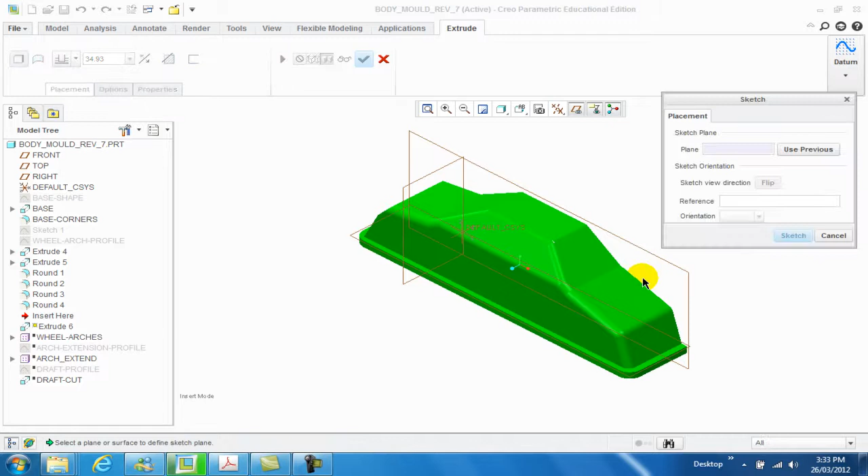For the next tutorial, I'm going to show you how to put a small hood scoop on the front of the car. I'm just going to put one on this side, because you notice this is only half of a car, right? So the first thing we do is we click Extrude, Placement, Define, and I'm going to select this. You see how that surface is lighting up? I'm going to sketch that,

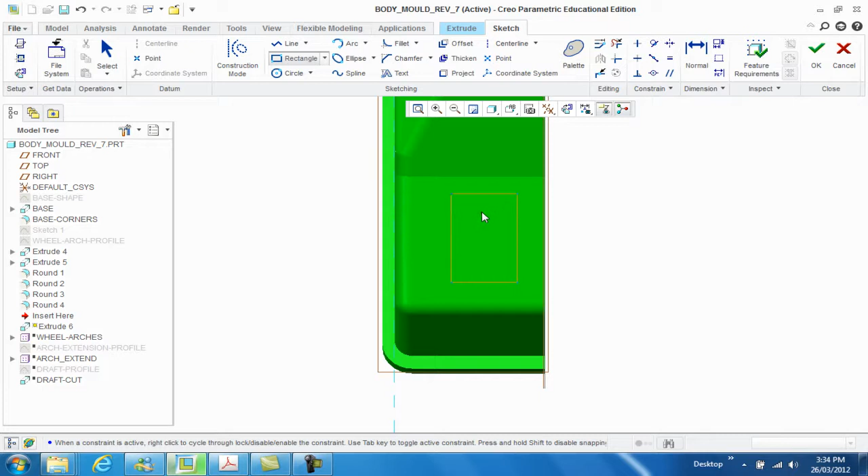and I'm going to go like that, bring it up, holding the Shift key down. I'm going to draw one right here. All I'm going to do is take a rectangle, just make it a fairly rudimentary one. Okay, something along that line. You can change the dimensions, as you know. Right now you can middle mouse button and then you can click this button and change the dimensions. For my purpose right now it's not important.

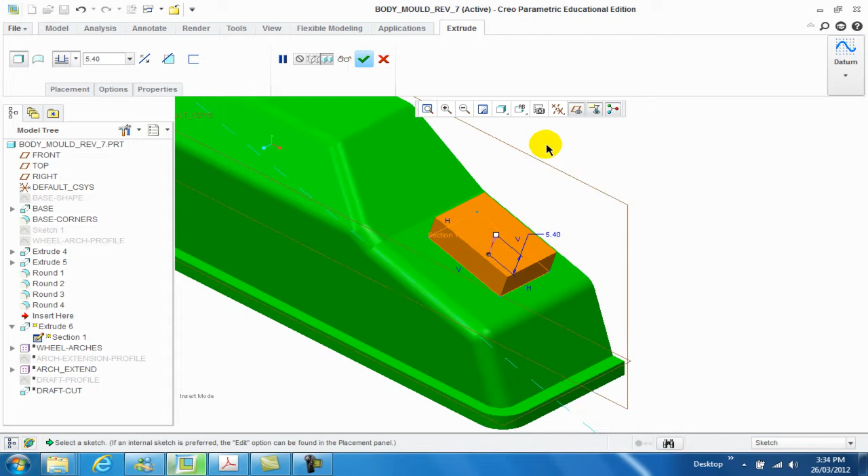I'm going to click OK, and then I'm going to click AB, Standard, and there it is. And I want to bring it down now because it's way too high in my way. Bring it down to look something like, I don't know, about like that. And holding the Shift key down, I can bring it into the center. 5 millimeters. Yeah, that looks all right. Maybe I might bump it up a little bit higher just for our purposes today. Now I click OK. Now it's a big block on the hood.

Now the next thing I do is I'm going to do a chamfer to try to cut this. So you click the chamfer tool. I'm going to click it here, and that's definitely not what I want, is it? So I'm going to click the Escape key. And do you want to cancel it? Yes, I do. I'm going to do that again, chamfer tool, except I'm going to click the correct one this time. I'm going to click here.

Now, if I drag this out, it doesn't look right. So I want to change the angle a little bit to play around with these angles, and you'll see what happens. Angle times D. I'm going to change the angle from 45 to something more like that, and then drag this out and see what it looks like. So that's something more along what I'm looking for. And bring the angle down a bit more again.

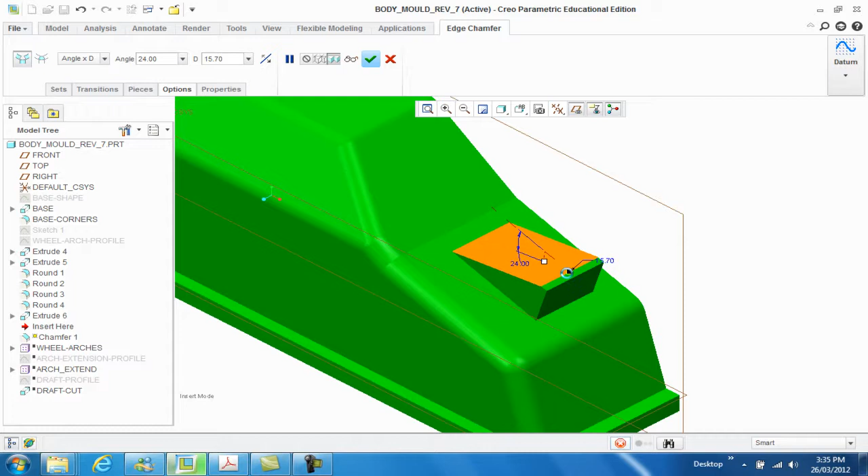This is the nice thing. Pro Engineer Creo Elements is so flexible this way. Bring that out a little bit more. I'm going to leave it like that. Kind of like the look of that. And click OK. Now, right here, I'm going to blend it off. I want to make a nice little round right across there. Something like that looks pretty neat.

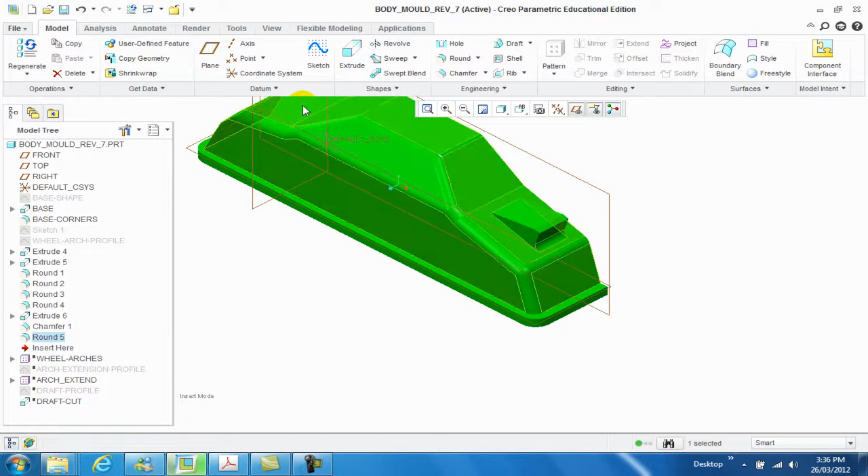Yeah. This edge here, I want to chamfer this edge. You could anyway if you wanted to. Actually, you know what? I'm going to leave it like that. Kind of looks like an old Dodge, which is my favorite car. AB, standard orientation, and there we go. We have a hood scoop on our car. So as you can see, it's starting to look like a car.

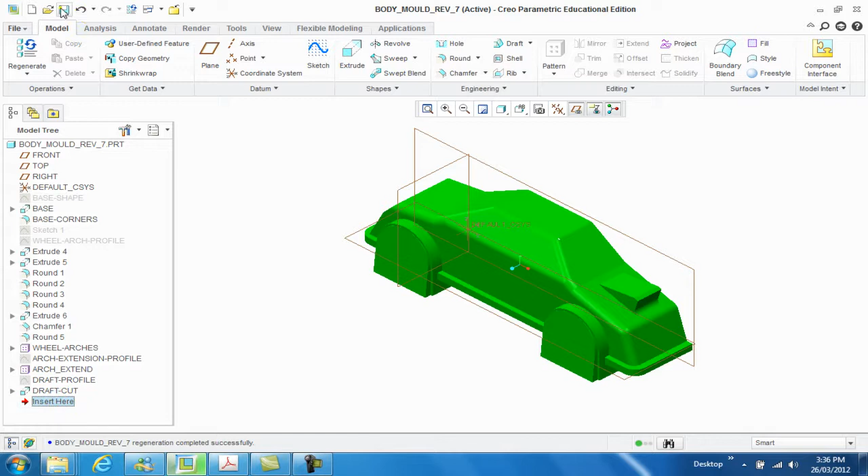Now, just for fun, you see where the insert here is. I can drag that back down just to bring my wheels back, so I can have a look at it, see what it looks like. I'm going to take it back up and leave it there. Actually, I'll just leave it down there for now for our purposes. I'm going to click Save. Alright, save it. Hopefully I'm not overwriting my file. I'm going to click Stop.